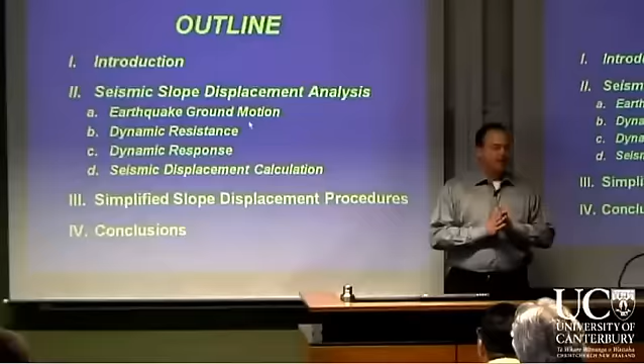The outline for the talk I'm going to give today is a brief introduction. You wouldn't be here unless you thought seismic slope stability was important, or were forced to be here because you were a student in my class.

We'll get right into talking about, with the aim of looking at simplified methods, the components of a seismic slope stability analysis. I want to go through these components because I think you should judge my method and other methods in this area by how well they capture the earthquake ground motion.

How well do they capture the dynamic resistance of the system? How well do they capture the dynamic response of the system? And then do they do the calculations correctly and provide good insight?

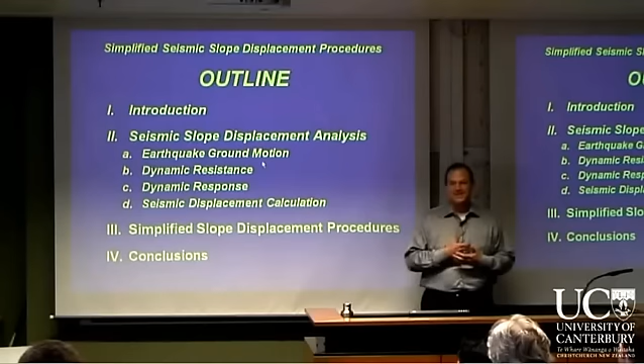Then I'll talk about the 2 bookends in terms of simplified methods. Really the landmark work is Newmark and Makdisi-Seed. Most senior engineers have performed Makdisi-Seed 1978 type analysis countless times and feel comfortable with it. Now this new guy is coming along to propose that you should be using the Bray and Travasarou 2007 method, and we'll see how that goes.

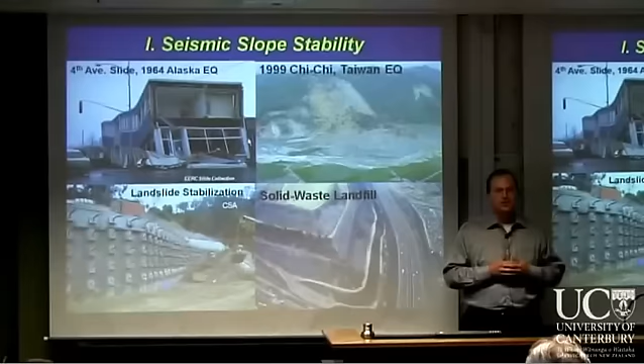Seismic slope stability is obviously very important. If you go to the 1964 Alaskan earthquake and look at the 4th Avenue slide and what it did to the infrastructure of the city of Anchorage, it's obvious that a clay slope, or a Bootlegger Cove clay, a sensitive clay, can undergo deformations that lead to disastrous impacts on the superstructure.

We have countless earthquakes that show landslides induced by earthquake shaking, and of course you had yours in the hills. In terms of projects, this is a landslide in Santa Barbara, Southern California, with Cotton Shires and Associates, where they had some static-induced landslides. In fixing that, they also have to look at the seismic considerations. And then we have potential cases like this.

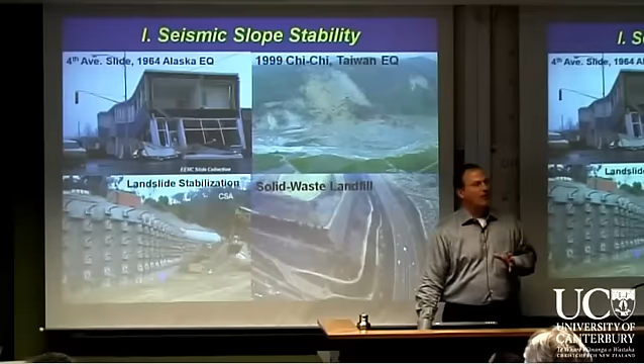This is actually a municipal solid waste landfill, a very nice way of saying we've got 60 meters of rubbish hanging over this very, very busy freeway. And if this is a slope of 1.3 horizontal to 1, if this fails and moves on top of this, that's not going to be a good situation.

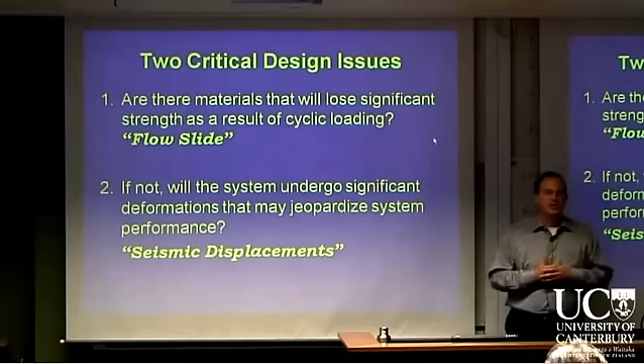So there's two critical design issues when we get into looking at seismic slope stability. I always want to step back. I'm known as the K guy, because we'll see as we get into this lecture, we talk about seismic coefficient, that's K. People will call me up and say, give me a sense of what the seismic coefficient is for this project. And I'll always sit back and go, wait a minute, what's in the foundation of this thing you're talking about?

What's the actual material comprised of, with the actual structure? Because nothing is more important in geotechnical earthquake engineering than the case where a material loses significant strength as a result of earthquake shaking. If you have liquefaction not only within the earth structure, but maybe in the foundation, that can lead to the dramatic flow slides that are disastrous. So always step back and look at that problem first.

The second most important issue is if you do not have materials that will lose significant strength, if you do not have a liquefaction problem below your structure or within your structure, then it's, will you get enough deformation that it might jeopardize performance? So now we have to have some methodology for calculating seismic displacements, because that's going to be our measure of performance.

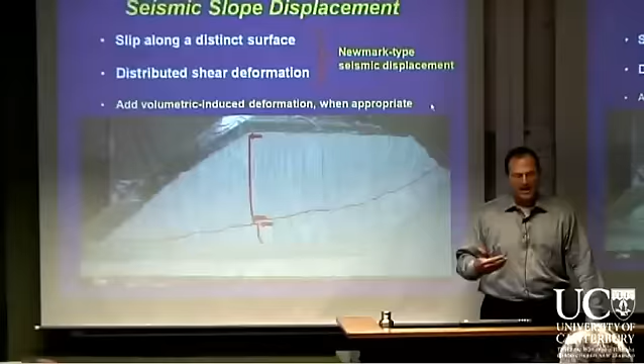Now, when I talk about this, I want to pull this in. This is a cutaway of a clay slope that was built in the laboratory on the shaking table at UC Berkeley. And we actually found that using spaghetti after dyeing it was excellent as inclinometers, because they had about the same strength and resistance as this model clay.

So we could put this slope on the table, we could shake it, and then we could actually excavate back. We have a number of displacement gauges and accelerometers, but we can actually cut away and look at the displacement field. And one thing you see is that there actually is a failure plane that develops.

You can see the offset in the spaghetti. So there is a clean offset where one block is sliding over the other block, and that's partially contributing to the total horizontal displacement at the top of the slope. But very importantly, you also see distributed shear. So there's two components when it comes to deviatoric shear, or distributed shear, or shear-induced deformations.

What I'm calling the Newmark type seismic displacement is the distributed shear within the sliding mass, because it's not rigid. And of course, it's the actual sliding on the slide plane. Very importantly, I am taking volumetric out. There's obviously no volumetric settlement in a saturated clay with undrained loading.

But I think you should, at minimum, even with a simplified method, want to break the world into volumetric, how much shakedown do I get, and then think about shear and deviatoric displacement separately. Because, yes, those things that cause more deviatoric response in a slope will tend to cause more volumetric response too. But for example, with a case with a saturated clay, that's not true. So a lot of other methods mix these two, and I think that's just fundamentally wrong.

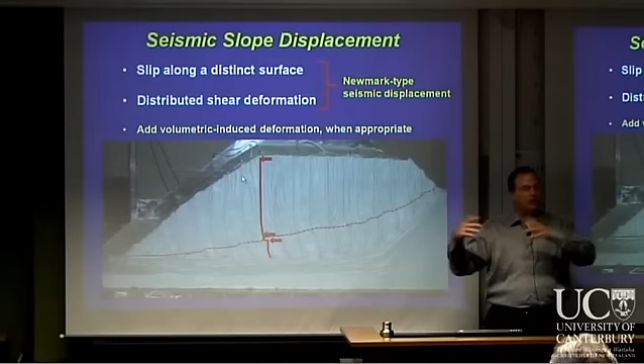So I'm going to say that my method is focusing on Newmark type displacements, which are focused on shear-induced deformations. If you have a system that's going to have volumetric shakedown, calculate that separately and then add that in to get the total displacement at the top of the slope.

We can do this in a very elegant way with advanced numerical analysis using a fully nonlinear model. So, for example, this is, before we cut it away, this is looking through the plexiglass. This is the original shape of the embankment. This is the post-deformation shape of the embankment. And you can see that it moved as a result of the earthquake shaking.

That's pretty good, so we can do really well on analysis. But let's be honest here, I can do well because I've actually measured the base motion. It's great to do an experiment and know exactly what the motion was at the base, but how many times do you have an accelerometer below your slope that has measured exactly the earthquake you're going to feel and have to design for? Recognize that these fancy, advanced analyses are only as good as the input that goes into them, and there's still value to a simplified method to get you in the ballpark.

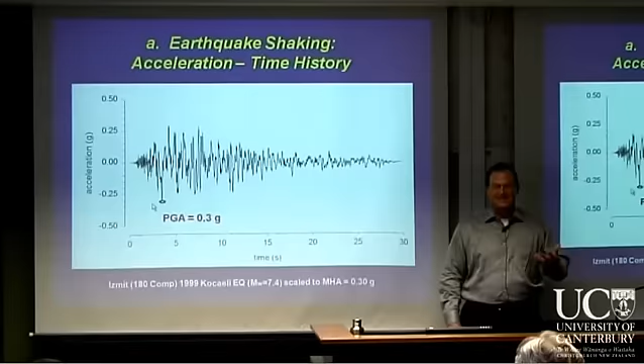The only thing that fully describes it is a time history—acceleration, velocity, or displacement. But we often like simplified parameters, such as peak ground acceleration. Obviously, we've known for some time that PGA can't tell us everything that's important. It's amazing how many times we get into arguments with regulators and reviewers about what the PGA should be, when in the end it's not the most important thing. There's other important things like frequency content and duration. Duration is critically important to any deformation-based analysis—the more significant cycles you have, the more cycles of slip you have.

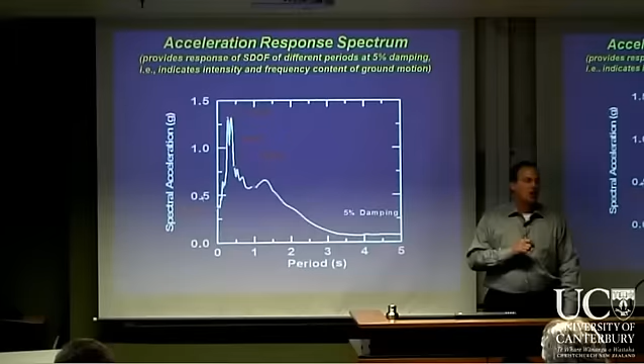The structural engineers got it right a long time ago when they came up with the concept of using an acceleration response spectrum at 5% damping, because it captures the intensity and frequency content of the ground motion. In a study we did for the Pacific Earthquake Engineering Research Center, where we tried to find a better way of characterizing ground motion, we found this works a little better in the short period range, this works a little better in the intermediate range, but across the entire period range, we could not find something better than spectral acceleration at the degraded period of whatever was shaking—whether it was a building, a bridge, or a slope.

So why not use spectral acceleration at the period of the system, since that brings in the intensity and frequency content? If someone is fighting you about PGA, you say: you pick whatever PGA you want, I'll pick the spectra and the ground motion, and I'll get it to be what I want in the period range of interest. That's what really matters. There's no regulators in this room, are there? Because I'm giving away one of my secrets.

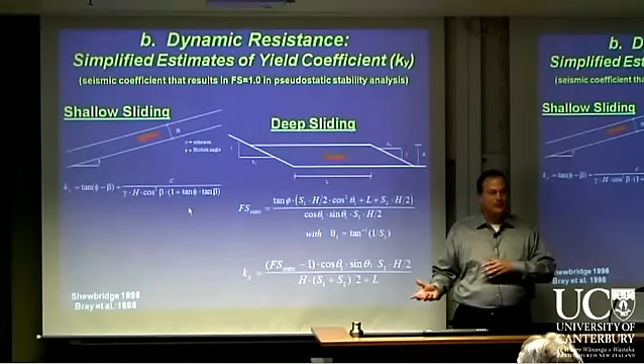Okay, then we get into dynamic resistance, and I want to spend a lot of time on this. If it's going to be a simplified method, I've got to give you some simplified equations. These are in the handout and in papers, so you can pull them up—one's an infinite slope analysis, the other's a deep sliding analysis. These are ones you can actually hand calculate, so if you're out in the middle of the field you can do those hand calculations. It's not that difficult to have your iPad or computer with you, and most of you have pretty easy slope stability analysis programs, so you can calculate the yield coefficient pretty easily.

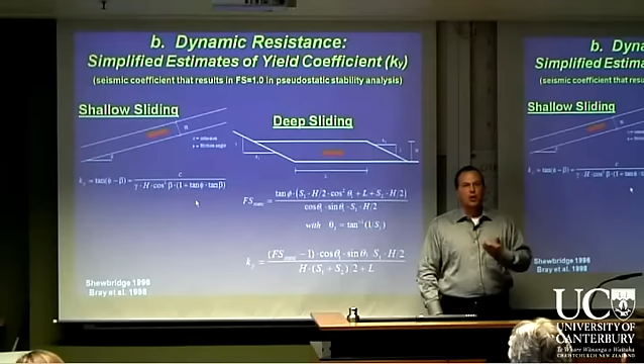The yield coefficient, remember, is that seismic coefficient you apply—a horizontal coefficient applied to the sliding mass, where when you apply that, the factor of safety drops down to 1.0. So you're doing a pseudostatic analysis, finding what seismic coefficient produces a factor of safety of 1.00.

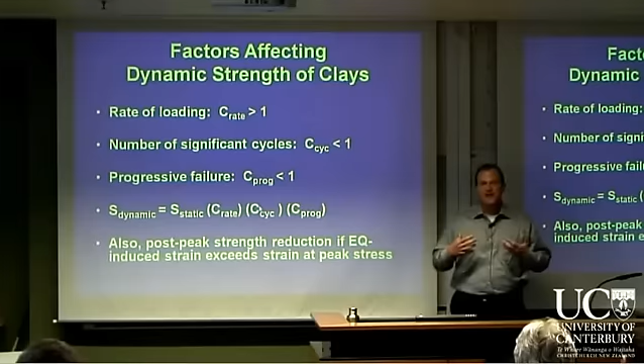As in typical geotechnical engineering, when it comes to static or seismic slope stability, it's the geotechnical properties, the engineering properties that really matter. So, for example, let's talk about clays—factors that affect strength of clays. We know we can spend a lot of time coming up with the static strength of a clay. In undrained loading, we might do a total stress analysis of that in an earthquake and ask, okay, what's the static strength? How do we modify that for dynamic considerations? We realize that clays are viscous, and so there's a rate effect.

That tends to be something in the range of 1.1 or 1.2 or 1.4. We know we get about a 10% strength increase for a log cycle increase in strain rate. But we also know from laboratory testing that as we work the clay and cycle it, we develop pore pressures, reduce the effective stress, and soften it, and its strength after that tends to be lower. So that's a factor that brings things down.

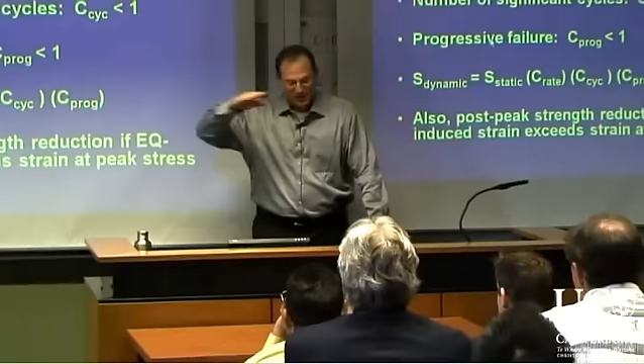Another thing is progressive failure. It goes in line with the entire failure plane not being mobilized at the same time, and I'll talk about that in the next slide. The important thing here is the static strength is where we spend most of our time discussing, investigating, and arguing. Then it's very important to select something that will bump it up because of rate effects, something that will bring it down because of cyclic loading, and something that will also bring it down because of the progressive nature of the failure if you have a strain softening material. And that's how we get the dynamic strength.

Clay does not have a single dynamic strength. It has a dynamic strength that's dependent on the earthquake shaking. So it's entirely consistent to use different strengths for the same clay depending on the ground motion.

If I hit this slope with a near fault forward directivity ground motion that has one pulse but it's really intense, I could probably take full advantage of the rate effect, and I don't have to take the softening due to the number of cycles because it's really a monotonic loading. It's just coming at it really fast. So for that case, I might use a dynamic strength that's 1.2 to 1.4 times the static strength.

On the other hand, if I have a backwards directivity, or I have the Alpine fault break, and I've got a low intensity ground motion with a lot of cycles, I'm not going to get as much of the rate effect. I am going to get a lot of degradation. Maybe that's a 20% drop or more depending on the soil. So for that earthquake, when I run it through my slope, I would probably use a dynamic strength that's less than the static strength.

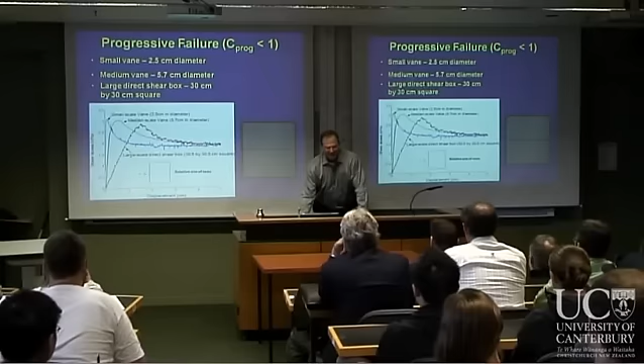I want to talk about this progressive failure because that's something that hasn't been talked about as much. The best way of looking at that is we took some model clay and put a really small vane in it, 2.5 centimeters, a bigger vane, and then we actually put it in a box and did a direct shear test. This is the actual measured shear stress versus displacement of the small vane, the medium vane, and the large test.

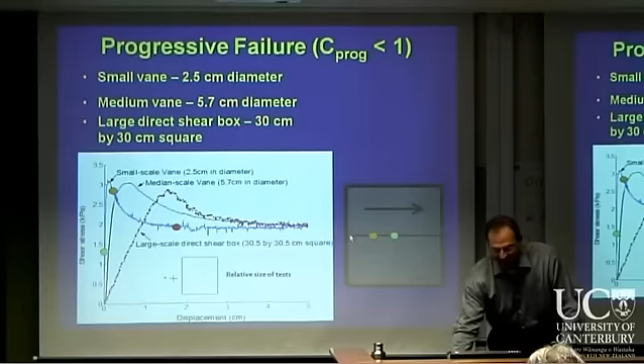If we think about the block moving, this clay right here actually immediately gets up to peak and starts getting down to residual. This clay here might have just passed the peak strength because of the deformation, since this is compressible material, we're moving the slide versus the bottom side, so this might have gotten down to just past peak. This clay is just finding out that it's starting to get mobilized. And so when you smear those together, you actually get this. We've actually done model testing where we break this into a bunch of little elements at the element level and use properties that are dependent on the stress deformation behavior, and we can actually match this.

The important thing here, it's a good and a bad. Good is it's more ductile. We're always worried about brittle failures. When you start smearing things, because you're not achieving failure along the failure plane all at the same time, it smears things a bit, and it's a little bit more ductile than what a vane shear in the field would suggest. On the other hand, the strength, because you're not mobilizing the peak at every element level at the same time, is actually less. So it's typically a 0.9 factor.

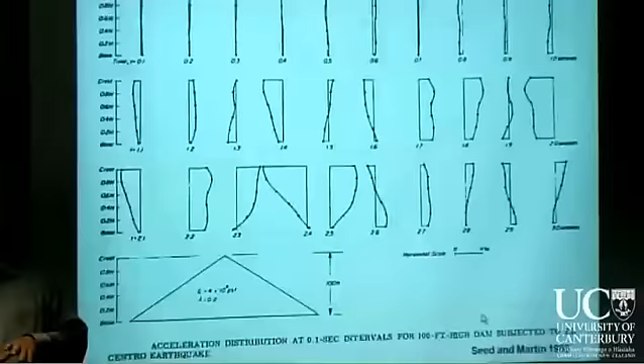Now into the third component, the dynamic response of the sliding mass. I like to go back to this because Seed and Martin in 1966 wrote a classic paper. In fact, before you read any of my papers, you should read Seed and Martin 1966. And I love this too because they borrowed this idea of an equivalent acceleration from a brilliant structural engineer named Anil Chopra, who was a graduate student looking at dams. Chopra made tremendous contributions in looking at concrete dams, and he recognized that concrete wasn't rigid, so he developed this equivalent acceleration concept. Seed and Martin were smart enough to borrow that idea and bring it into geotech, and that's the basis for the Makdisi-Seed method, and you're going to see that's also what we did later.

Back then analysis was very costly, so this was a very simple equivalent linear analysis with assumed shear modulus and damping, 30 meters high, very triangular, and they just ran the time history through, looking at what the acceleration profile right through the middle of the dam looks like at different times. Very important.

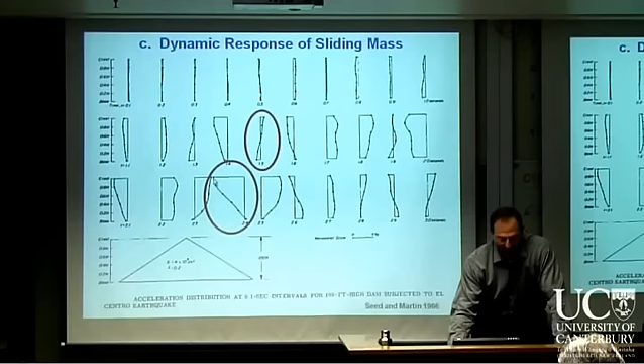Early on, maybe things are coherent, and everything's shaking back and forth together. But for example, at 1.5 seconds into the strong shaking, the top is accelerating to the right, the bottom is accelerating to the left, and the middle is not going anywhere. So I cannot use the acceleration at the base and apply that. I can only use an acceleration at the base if I believe what's above me is rigid. 100 feet of soil is not rigid, so I can't. Look at this case where I have my maximum acceleration to the left, at the crest is the maximum acceleration there, but the actual acceleration at the base is zero. So this is why they came up with this equivalent acceleration concept.

The idea is you take a sliding mass and you realize that it's not a rigid block, it's deformable. So we take each differential mass within the system and you take the acceleration acting at that level, you add all those up, you divide by the overall weight, if you want a dimensionless coefficient, to get this equivalent acceleration. That is the correct thing to use if you actually have a deformable body.

Now, because force is equal to mass times acceleration, you can make this even simpler by saying this equivalent acceleration time history is just the shear stress, the horizontal shear stress acting on the failure plane, if I have a 1D case, divided by the total vertical stress acting at that depth. Again, you've been working a lot on liquefaction because you've had a number of earthquakes that reminded you how important liquefaction is. This is not dissimilar to R sub D, okay, with the whole idea that you take this incoherence in and you have a reduction factor because of that.

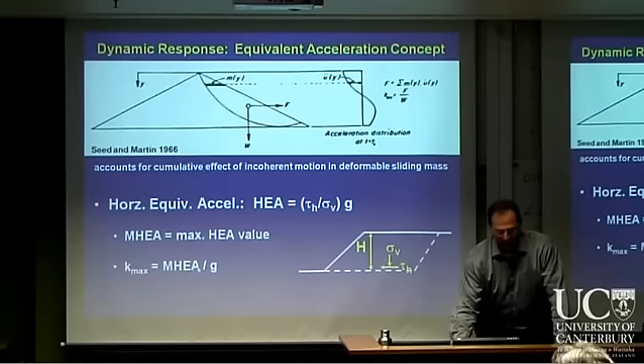I call this the equivalent acceleration, horizontal equivalent acceleration, to emphasize it's horizontal. The maximum value is the MHEA, and Kmax, which is the maximum seismic coefficient, the index of the maximum load, is this MHEA, which is in units of G, divided by G, so it's just this value without the G.

So let's look at what affects Kmax. The work done by Ellen Rathje and myself shows that Kmax, this dynamic loading, for a range of ground motions, I think we used a suite of about 80 ground motions. We used different profiles of foundations, different soils on top in terms of the sliding mass, and we found that Kmax varied as a function of PGA of the rock, which makes sense. If you double the rock motion, you probably double the intensity. But soil response is nonlinear, and so that's why we have a nonlinear response factor in there. It's not just strictly double the ground motion, double the seismic loading.

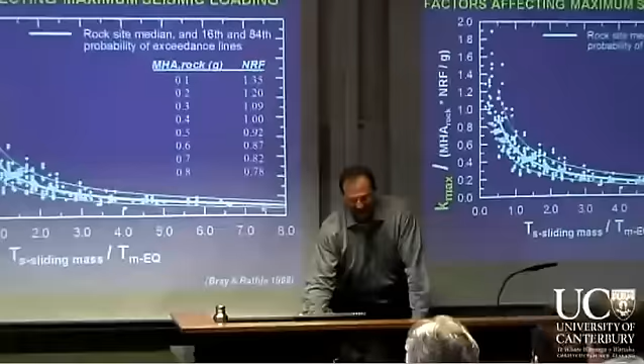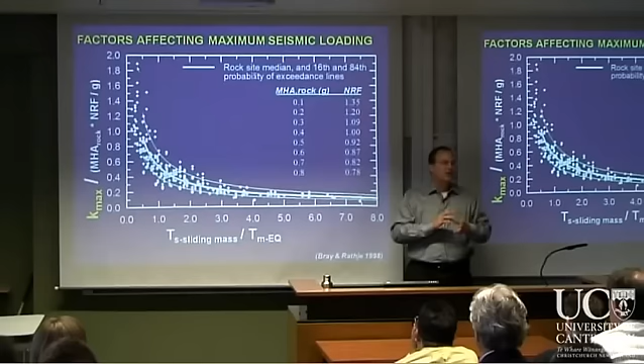But very importantly, it's a function of the period of the sliding mass and the period of the earthquake. As the system gets softer and softer and it walks away from where most of the energy is located, it's not shaken as hard. The seismic Kmax value is not as high as it is when you're basically near resonance. This kind of result tells you that near resonance, I can get really low responses and I can get really high relative responses. So a simplified method, and even a fancy, advanced analysis, is going to be much more difficult when you're near resonance, because every little detail is going to matter. But the simplified method might work really well because there's a nice controlled systematic reduction as you're walking away from where the energy is located.

This is kind of focused, or a resonance is at 0.5 instead of 1, because I'm using the initial period of the sliding mass. I'm not using the degraded period.

Kmax, this maximum seismic coefficient, is a function of the stiffness and the geometry of the sliding mass. A good index of that is the fundamental period.

If you actually have something that looks like this, you can just say, okay, 4H over Vs. If it's something like this, you can say, okay, that looks a little bit like it's 1D. I'll come up with an approximate equivalent H, and use that as my estimate for my dynamic period.

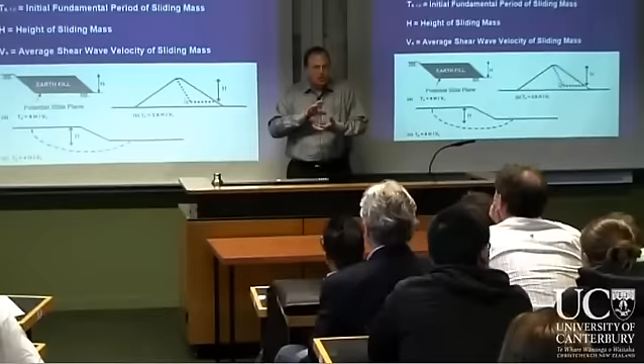If you look at a 2D section, some nice work done by Ambraseys and Sarma shows that that is 2.6 times the total height divided by Vs. So estimating the shear wave velocity of the potential sliding mass material, its stiffness, and having a sense of geometry is important, because what shaking matters is whether it's a very short structure or a longer structure.

Then there's the actual calculation, and there was a lot of work done on this in the 60s and the 70s, but we've converged to a methodology that does this double integration very nicely.

It's very important to remember that the initial Newmark analysis is a rigid block on top of a rigid plane shaking back and forth, and when you exceed the yield acceleration, you start to get slippage, and you keep on getting sliding until the velocities coincide. So there's a number of very restrictive assumptions.

Key parameters: the yield coefficient, that's the maximum dynamic resistance. The seismic coefficient Kmax is the maximum seismic loading. That ratio is important - if it's greater than 1, we essentially have no displacement. If it's less than 1, we get displacement.

Driving this point home, this is actually a large landfill, relatively 45 meters high, relatively softer material, so it really shows the importance of incoherence. I'm looking at rigid block assumption versus a deformable sliding block assumption, and looking at sliding along the cover, which is just about a meter down, at mid-height, along its base.

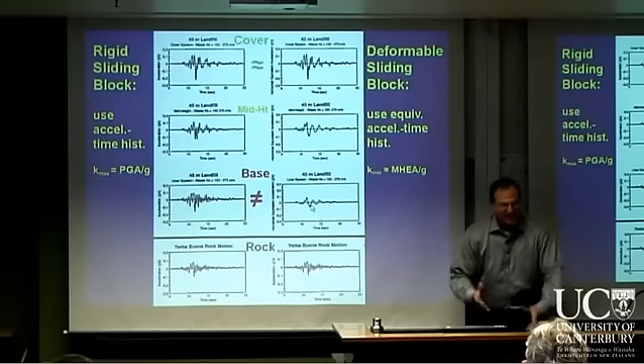Just letting you know that I put the same rock motion in these columns that we're analyzing. What we see is for base sliding, the equivalent acceleration, because it takes in effect the incoherence of the motion, is significantly different in terms of its characteristic than the acceleration time history.

If you calculate an acceleration time history at a point and you double integrate that with the Newmark method, you're assuming everything above is rigid, and that's not right. If you're down 45 meters into a waste fill, that's relatively soft. That assumption's not bad if you're only a meter into fairly stiff soil.

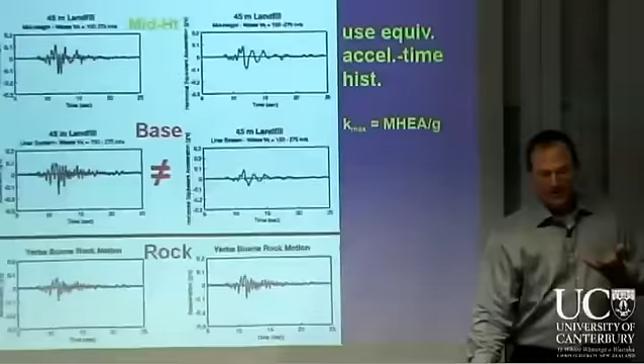So you can use the calculated acceleration time history directly to double integrate with the Newmark method to get the right answer if it actually is nearly rigid or incredibly stiff.

That's really what Seed and Martin saw, and then that was incorporated in Makdisi and Seed. And in fact, Bob Whitman, when he did a review of this, he kind of started calling it the decoupled approach, because what you do is say the system's not rigid.

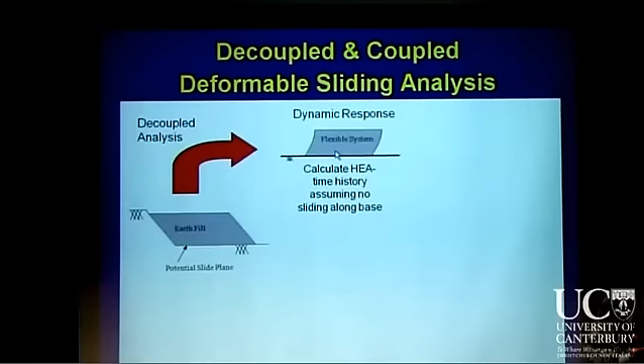People who just use an acceleration time history are assuming it's completely rigid, and that's wrong. They improved it by saying, well, no, it's an actual system that has flexibility. It doesn't have a period of 0. It has a period of a half a second or 1 second or 0.3 seconds. It has some dynamic response.

So they use something like Quad4 or Flush or Shake or DMOD or Plaxis to calculate the dynamic response of the sliding mass. Then they use that equivalent acceleration time history, double integrate it with a Newmark analysis to calculate displacement. Now you can see the reason why it's called decoupled.

It's obviously wrong. This method assumes continuity of displacement - there is no slip on the slip plane. I'm calculating a response and then calculating slip on the slip plane. So this is an improvement over the rigid block assumption, but it's not correct.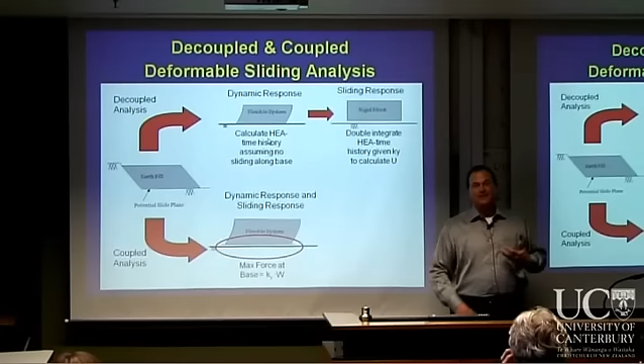Actually Anil Chopra in 1991 realized that and came up with a fully coupled analysis for a concrete dam. Ellen Rathje and I said, well, that's really nice - let's take that and make it into a soil, use the right functions for that, and do the same fully coupled analysis. So we developed a technique that does a fully coupled analysis.

So the system is shaking back and forth, and when you exceed the acceleration at the base, and it can no longer sustain that, it starts to slide. And while it's sliding, it's still shaking back and forth, and you capture all of that at the same time.

Now that we have this better, more correct method, it's been validated by some simple model tests where we shook not just a rigid block on a rigid plane, but soils of different stiffnesses. We find that the decoupled approximation, looking at the difference, when we're on the high side, the decoupled method is conservative. The method most people use, the decoupled approximation of Makdisi-Seed, is typically conservative. It's not overly conservative until you get to really large displacements, but by then you probably already know you have a problem anyway. So in the range of engineering interest, it's not a bad method.

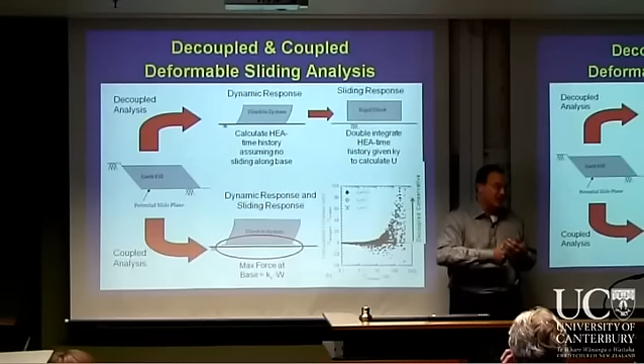There are some cases where it's unconservative, and those cases are forward directivity, near fault pulses. So when you're close in to an earthquake and you get a pulse, if that pulse just happens to line up, you can have greater displacement with the fully coupled method, and sometimes you can get less displacement. We just don't really understand those trends as well.

The most important thing to do, let's say you do a decoupled analysis, is to run scenarios. Say I have two characterizations: characterization A, which I think is my best estimate of soil properties, shear wave velocities and dynamic properties, and characterization B, where shear wave velocities could be a little higher or lower and slightly different. Run those different scenarios for each ground motion. In this case, I'm showing 5 ground motions run for each of those 2 scenarios.

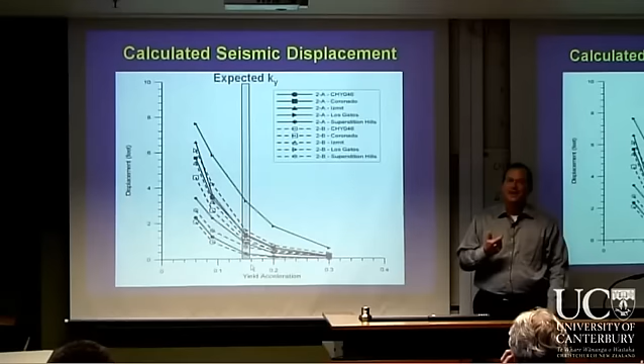You start to plot this up. Don't just calculate the displacement at the yield acceleration, but calculate it at lower and higher yield accelerations too, so you get a sense of how sensitive the results are to minor variations in yield acceleration. Because as geotechnical engineers we know we don't know the shear strength of clay to 2 significant digits, or definitely not 3, and we have uncertainty in these kinds of things.

So we want to use this as an index. I like to flip it around and look at it as a cliff. If I'm here, I could care less if it's scenario A or B. The ground motion doesn't matter as much, a lot of things don't matter. I don't need to spend more of the client's money figuring out details, because with large uncertainty in KY, I get the same answer: safe, low displacements.

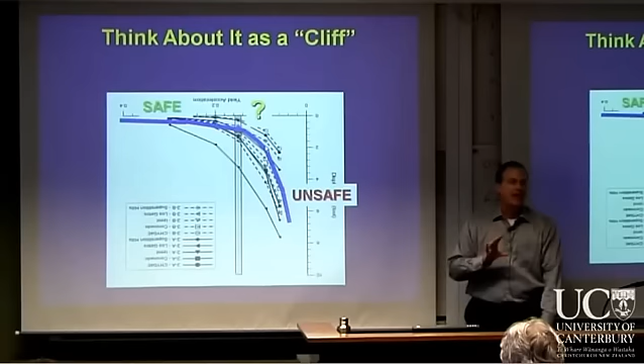I don't care over here either. Regardless of what's going on, I've got large displacements, and I don't need to invest the client's money to basically say I've got a problem. The simplified method, or these kinds of decoupled analyses, when you get answers in here where I'm not sure if it's here or there, and that's the make or break line, that's where investing in more advanced analysis and better site characterization will pay off.

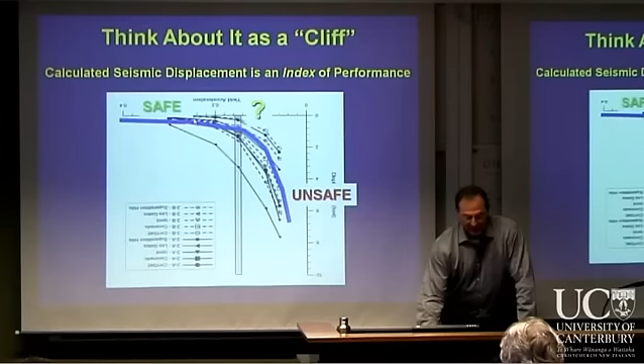So in reports I always call it the calculated seismic displacement, to remind myself and the client that this is a calculated number. I don't actually believe that this slope's going to move exactly 15 centimeters. It's going to move around 5 to 30 centimeters or so, something like that. So it's an index of performance, but it's still very useful, because there are cases of small displacement, large displacement, and moderate displacements.

For many projects, depending on the performance objectives, you can have small displacements. You never want to say zero, you want to say negligible, small, minor, give some range like 0 to 15 centimeters or 0 to 5 centimeters as the calculated range. You might have cases with large displacements, and maybe for this system more than 1 meter means you have to remediate, do ground modification, do something special. It doesn't matter if it's 2 meters or 4 meters, it's more than what's acceptable. And then moderate is somewhere in between.

It's critical to evaluate what this means to the system. I always like to step back and ask, what are the consequences of failure? Is it a tailings dam with people living downstream, or something that's 5 meters high with dry land on both sides? What kind of conservatism did I use in developing the seismic hazard? Did I use a 500-year return period, or a 1,000-year return period?

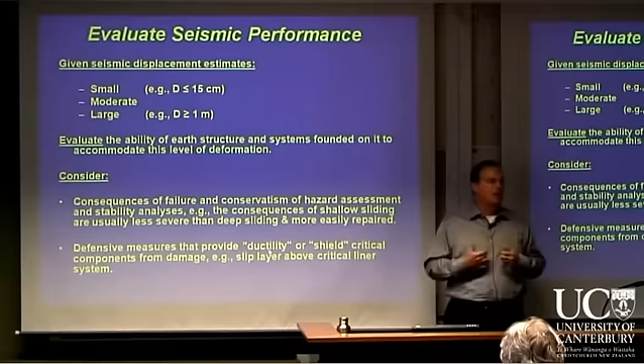And then the key thing is ductility. Are there ways, if I'm going to get a lot of sliding and have a critical system that can't withstand that level of sliding, to put a slip layer in a certain location that will let it slide there, as opposed to letting it slide wherever it wants, which might be through my critical system. So there are ways of engineering with that.

With that background, I want to take 2 critical analyses, and I'm going to try to be objective, but obviously I can't be fully objective because one of them's by me, of 2 well-used simplified methods: Makdisi-Seed 1978, and Bray and Travasarou 2007.

So let's look at this great landmark paper. There's 4 or 5, 6 steps, and we'll go through them. Number one is they very carefully talk about strength. Even though they're coming up with a new method for doing seismic calculations of seismic displacements of slopes, they spend quite a bit of time talking about those things I talked briefly about, reduction in strength due to cyclic loading and things like that.

What they say: if it's significant strength loss, don't use the method. If it's slight, they say use a small reduction. And the reason why: limit equilibrium has a rigid, perfectly plastic assumption, but real soil is nonlinear. So what they're realizing is if you cycle up to 90% of the peak strength over and over in time, you will accumulate distributed shear. They didn't call it distributed shear, but they're saying before you actually get localization and failure, you can accumulate deformations.

And so that's why they're saying use a small strength reduction. You calculate your yield coefficient based on geometry and the strength. This is my biggest headache with their method. All you have to do is do what I have found in my experience to be the hardest thing in the world: estimate the peak ground acceleration, including topographic and site effects, at the crest of a slope. That is one of the witchiest numbers in the world to estimate. It's all over the place.

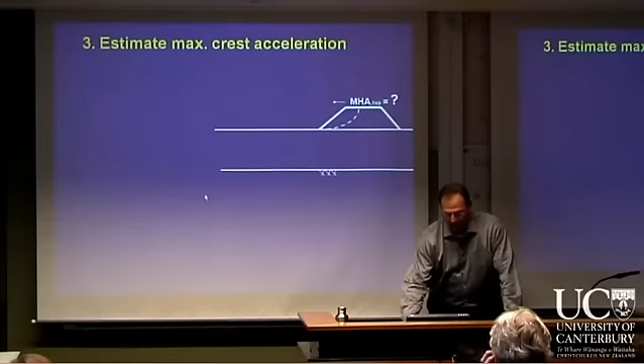Here's an assumption, here's an example. Here's some work done by Ellen Rathje and I, where given different rock motions of different intensities and different soil profiles, realizations, this is our estimate of the PGA, or the maximum horizontal acceleration, at the top. There's a bit of scatter there.

And so there are 2 types of engineers in the world. There's top-down engineers and there's bottom-up engineers. I started off life as a geotech when I transferred over from structures looking at fault rupture and how a fault comes up below a dam and impacts that dam. So I became a bottom-up engineer, and I've continued with that.

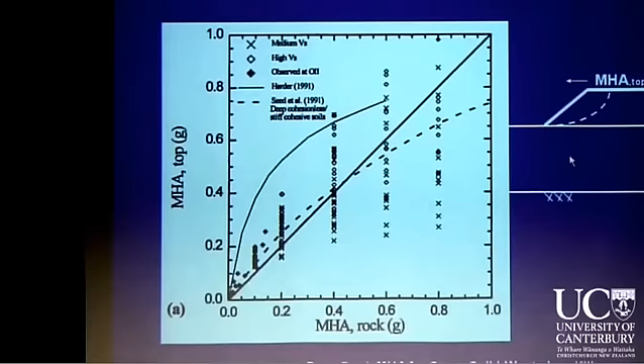And so that's why my methods kind of focus on the rock motion, characterizing that, and then seeing how it responds to the soil. This is kind of a top-down approach where you're getting the crest motion and then you're using that to go down and figure out the loading. This is a really hard thing to do.

If you have that, then this is a lot like R sub D, as you go deeper and deeper you get more incoherence, and so Kmax becomes a smaller percentage of the crest acceleration. But realize Kmax can't be more accurately estimated than the peak ground acceleration at the top.

The reason why I got into this is my first consulting job, I got involved and I did a fancy 3D dynamic analysis of a dam, and then I checked myself with Makdisi and Seed, and I got a value of Kmax over PGA out here. And so I knew I was wrong. And then I thought about it after checking it and realized they did one finite element analysis. Makdisi had cards back in those days, and he had to wait and pray that the computer would run those cards properly, and so he did one finite element analysis.

You cannot get a PhD at University of Canterbury, UC Berkeley, anywhere running one finite element analysis anymore, okay? But back in the 70s, that was a big deal, and then he ran something called a shear slice method, a very approximate method, and he ran it for about 6 ground motions. Okay? And so a lot of people think of these as bounds. Never call these upper bounds and lower bounds. They are not. If you actually look at the range of possibilities, it goes all the way out to here to all the way out to there.

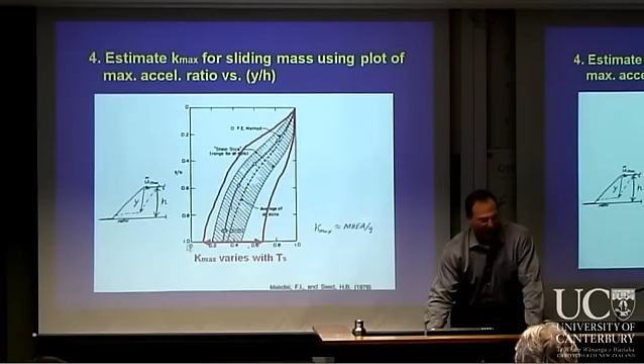Why does it vary in this way? It varies as a function of the period of the sliding mass. And when you look at the details of this uncertainty, there is some systematic variation within that chaos, and it's the period of the sliding mass.

Given that Ky and Kmax ratio, the thing that's missing is duration, so they use magnitude as a proxy for duration, and then you estimate displacement. This is on a log scale.

One thing when I teach this in short courses in the US, I always get somebody running out of the room. The famous Makdisi paper, they never corrected it, has an error in it, and if you use the actual chart that's in the original paper, you'll only be off by a factor of 10.

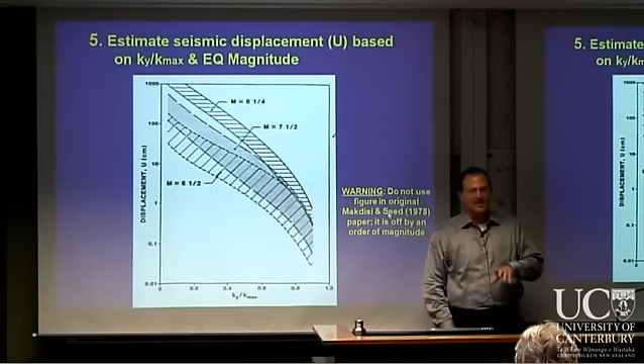Everyone knows that, right?

The late Professor Harry Seed was my mentor, a brilliant person, and I always listened to him. He said, and I quote, "It must be noted that the design curves are derived from a limited number of cases." He did a great job back in the late 70s.

For some reason, as great as this work is, it's kind of gotten entrenched as being correct, and it's almost wrong to challenge it. Nobody uses Seed and Idriss 1971 liquefaction triggering curves.

We've moved on to Youd et al., we've moved on to Idriss and Boulanger, we've moved on to the Seed et al. method. But for some reason, engineers have a hard time letting go of Makdisi and Seed, even though the late Professor Harry Seed said, hey, if you get more data and you can do better, you should revisit this problem. Why? He used a very limited number of ground motions.

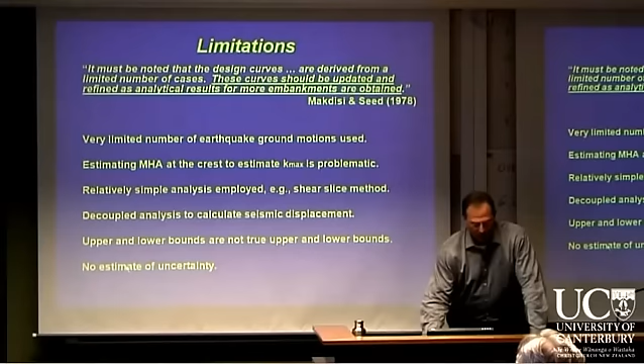He used the PGA at the crest, which has a lot of uncertainty. He used a very simple method, shear slice method, decoupled analysis. The upper and lower bounds are not there, and we're trying to get more into performance-based engineering. There's no estimate of uncertainty.

So let's look at it another way. Let's look at the Bray and Travasarou method. Not smarter, not better, I just have more data. He or she with more data should win.

So we're going to do a fully nonlinear, fully coupled, deformable stick slip analysis because we can with our computers. We're going to go ahead and say, let's use 8 different TS values, 10 different KY values, so we have 80 of those cases.

And this is the most important thing, the ground motion. So let's take all of the ground motions from the NGA database that was available for shallow crustal earthquakes, and let's use all the ones that are within 100 kilometers for 41 different earthquakes, run them through, and let's have Thaleia run 55,000 analyses so you don't have to.

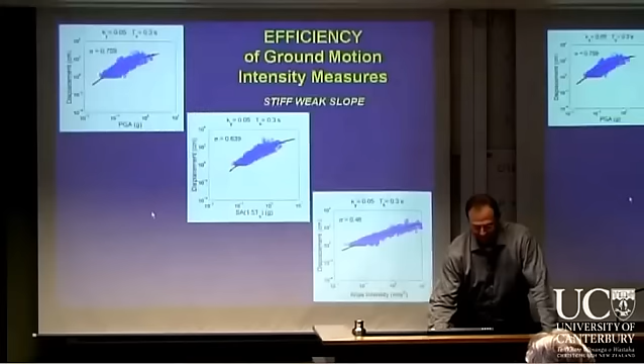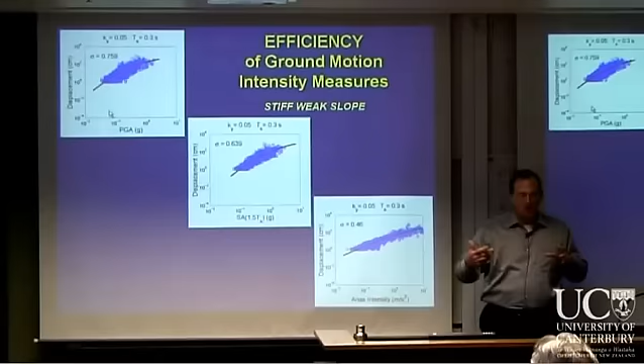First thing to do is, after you've done 55,000 analyses and you pat yourself on the back, you go, okay, what do we do with this? This is not data, these are analytical results, but we can start examining them like they were data and say, well, what's the most efficient ground motion parameter? For example, is it PGA?

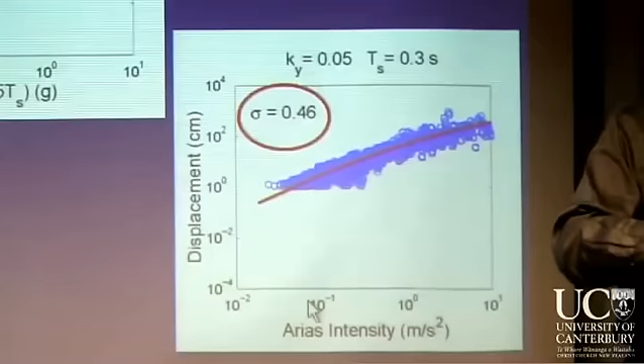You take the PGA of each record and correlate displacement versus PGA. How about spectral acceleration at 1.5 TS? Or how about Arias intensity? If the world was all stiff, weak slopes, it would be Arias intensity, and it captures the intensity, frequency content, duration. It's the one measure that's best if things are actually driven by acceleration.

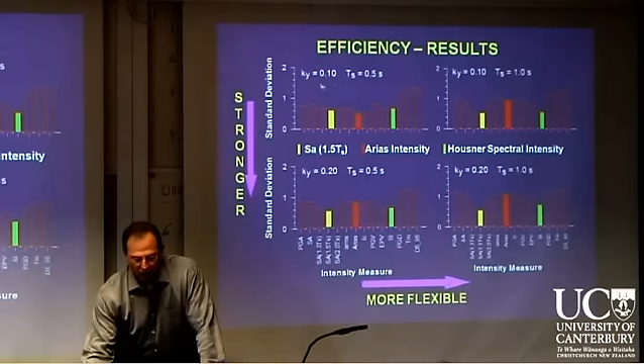But we're going to look at ranges. So this is actually KY of 0.1, this is KY of 0.2, both for a half a second sliding mass. This is same KY, but now we're going with a longer system, 1 second. So we're kind of looking at things that are weak and stiff, and then getting into things that are weak and more flexible. In this direction they're stronger and stiff, and eventually we get to being stronger in a relative sense and also more flexible.

We actually looked at 32 parameters, and I even came up with one called the Bray index, because this is my chance—Arias got famous, but I wanted the Bray method to work. I wanted the Bray parameter to work. It was a brilliant idea, but it didn't work. So you don't see the Bray one up here.

But what you see is PGA—I actually picked it because it's always good to pick some that will not work, it's a good sanity check, it better not work. Duration by itself doesn't work. Peak ground displacement by itself doesn't work. Some of the most promising are spectral acceleration at the degraded period.

That's why the 1.5 is there. This is the initial period, but with seismic shaking and induced strain, we actually get some deformation and some softening. So that's why the 1.5 factor is in there.

The red box is Arias intensity, and the green box is the Housner spectral intensity. What you find is, for example, if I have a weaker stiff slope, Arias intensity works the best. These are the standard deviations, so the smaller the better. But it doesn't do as well for a flexible system, because Housner's spectral intensity does better for a flexible system since it's out in the velocity range.

The one parameter that works the best over the entire period range is spectral acceleration at 1.5 TS. So we're going to use that as our characteristic of the earthquake.

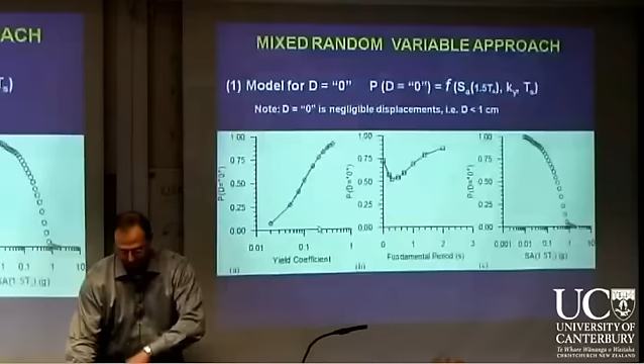Then we did the regression. You always do these regressions at least 3 times. The first time we did it, we found that data, whether it was 0.0001 millimeters or 0.1 millimeters, that's a big order of difference mathematically, and that was basically causing the form of our regression analysis. Then we got out of our mathematics room and said, we're engineers. Those are all the same number to me. Those are 0.

So we said, we can't let that data cause our regression to go the wrong way. We're going to say anything we calculate that's less than a centimeter, for all intents and purposes, is 0. So we want to predict when we get less than a centimeter. This is the probability of getting 0 displacement, where in engineering 0 is less than a centimeter. And you can see it makes sense: as the yield coefficient increases, you're more likely to get 0 displacement. As the ground motion intensity increases, you're much less likely to get 0 displacement. And there's an influence of the period of the sliding mass.

It's kind of almost the inverse of a spectra. So we say, okay, we'll have a function derived or regressed on the calculated data, as a function of these important parameters. Then we'll take all the other data that's greater than 1 centimeter and regress on that, and it'll essentially be based on the same things, but we'll have to add in duration, and a proxy for duration is magnitude.

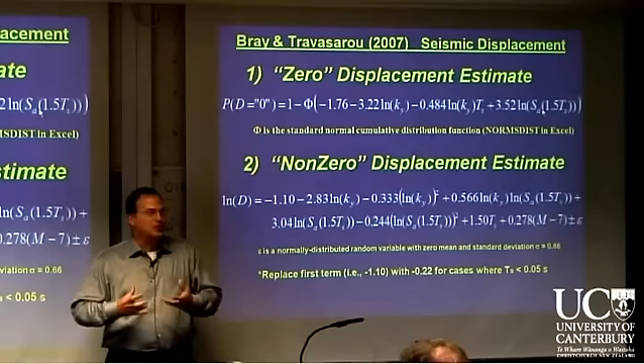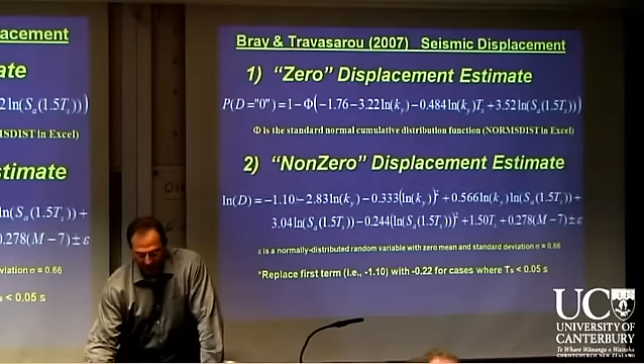Then, if I get a case where the probability of zero displacement is low, so I'm going to get significant displacement, then I go into this regression analysis, and I use essentially the same parameters and add in magnitude to estimate that. So let's look at the trends, what those results get you.

I'm looking at a magnitude 7 strike slip fault at a distance of 10 kilometers at a soil site. So my system that's going to slide is on this deep soil site. This is what the response spectra looks like at 5% damping. If I put that into equation 1 and plot the probability of 0 displacement going from 0 to 1 versus the period of the sliding mass versus different KY values, here's what I see.

If I have a low KY, it doesn't matter whether it's 0.04 or 0.08, I am going to get a non-zero displacement. It's a weak system. For this strong motion, this close in, of course I'm going to get that. So I don't spend money on measuring shear wave velocity. I don't care what the shear wave velocity of the soil is. It doesn't matter.

If I get into a case where I have a stronger system, then investing money into actually measuring, not just guessing or estimating, but actually measuring shear wave velocity might save your client a lot of money. Because I get a low probability if I have this as my period, but if I'm over here, I actually get a high probability of a zero displacement. So this is a nice way of getting a sense of what's important.

For the case where I calculate displacement for this ground motion at this site as a function of the period of the sliding mass versus the KY, again, you can see that for low KY values, the influence of TS is not that important. But for some KY values, that influence is really important, and so you should invest the money to measure the shear wave velocity.

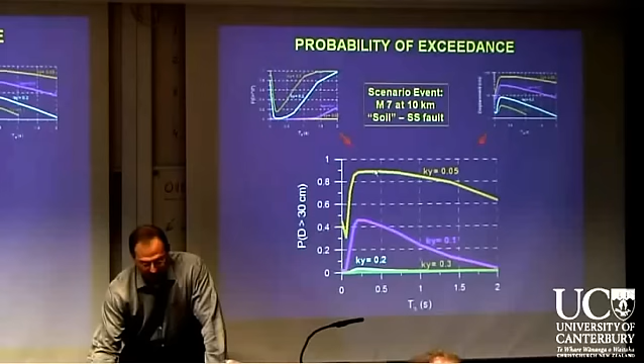I will most likely get less than 30 centimeters if I have a high KY value, regardless of what the TS is. If I have a really weak slope, I'm going to get more than 30 centimeters. But if it's an intermediate slope, I need to figure out what the period of the sliding mass is to be able to figure that out.

You probably want to know if it works, and the only true test is to actually run it against case histories. We ran through 16 case histories. These are just some of them, and I'll go through them real quickly.

First, I'm looking at a subset. These are landfills, solid waste landfills, that were shaken by the Loma Prieta earthquake in Northern California in '89. This is the documentation of how much displacement there was in reality, so this is the reality column. And this is what our method predicts for the probability of zero displacement. All of these cases, they shouldn't have much displacement, and if there is a displacement, it's low. So that's a consistent response. This is a good index of that performance.

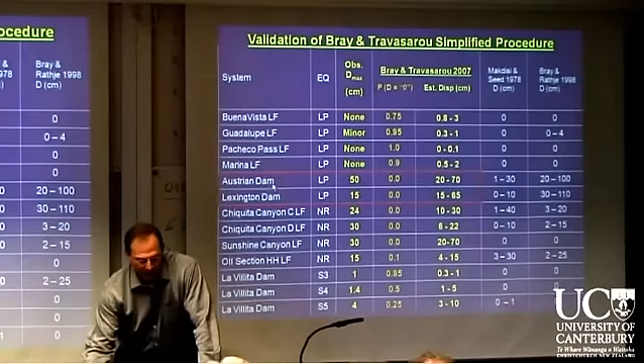Now we look at a couple of dams that were shaken by that same earthquake. You can see the actual observed displacements, 50 and 15 centimeters respectively for the Austrian and Lexington Dam. The method says you're going to get displacement - you're close to a big earthquake. And the level of displacement from the 16th percentile exceedance to the 84th percentile exceedance captures the range pretty well.

Let's go to landfills that were shaken by the Northridge earthquake. This is the observed movement. We're going to get displacement, and except for one case, which is the one that will never work out for any one of us, is this one we underestimated. But the rest of them, it's working pretty well. So I'm showing you that's actually our worst case right there.

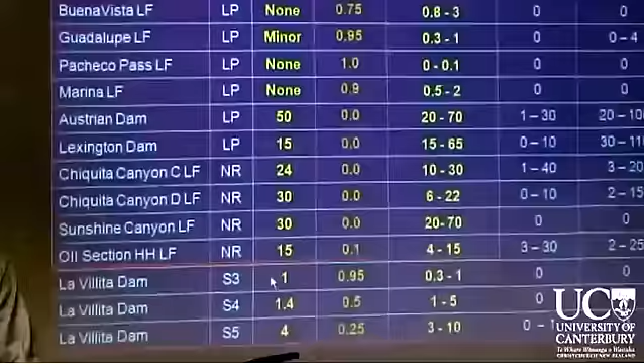And then this is too good to be true. I mean, I couldn't believe this. In fact, I still wouldn't believe it if I was in the audience. This is a dam in Mexico that was shaken by a number of events. They had really good instrumentation on it, so they had very precise measurements. Professor Elgamal at University of California at San Diego wrote a very nice paper on this. And there was a centimeter, maybe a little bit more than a centimeter, 4 centimeters.

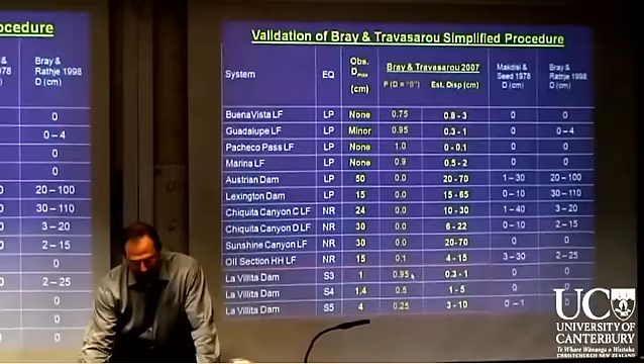I'm not as concerned about nailing the actual numbers. I think it's more important to get the trends right. And the trend is, as you go from S3 to S4 to S5, you get more displacement. Does the method have the same trends? Well, the probability of zero displacement goes down, and the amount of displacement goes up. It's actually maybe part luck and part greatness that it actually is in the ballpark.

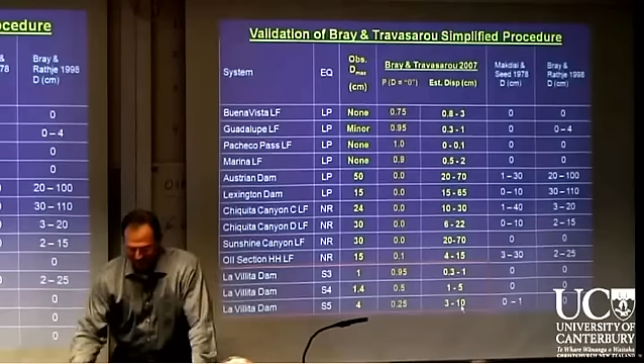Now, Makdisi and Seed is never wrong, and I didn't think that Bray and Rathje were not too far off either. So I'm not saying that what everyone's been doing is wrong. All I'm saying is now we have a refined tool. Because when you look at this, these are pretty consistent - low displacements, kind of intermediate or larger displacements, low displacements. They're consistent. It's just we're doing better now because I have 688 ground motions and they only had 6. And Bray and Rathje only had about 80. Plus, I think I've gotten a little bit smarter in 10 years.

Real quick example, and again, all these slides are available to you. This is actually Austrian Dam, but you don't know that, and I put it next to the Hayward Fault. It's not actually there, just as an example.

First, we look and say, okay, there's no liquefaction, there's no soils, even clayey soils, that will undergo significant strength loss. That's always the first check. We have some undrained strength properties based on some triaxial testing taken from this system. The KY was calculated with a slope stability program.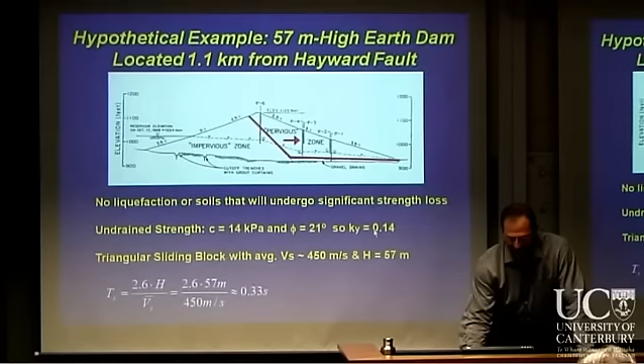Because this is more triangular, I'm using 2.6 H over VS, where that's the H. So I estimate 0.33. I look at my earthquake: it's a 6.9 at 1.1 kilometers. And so I calculate with reasonable ground motion models at that time what the spectral acceleration at half a second is, because that's 1.5 times 0.33, which is the fundamental period of the sliding mass. I get about 1 g.

I put that information into this equation. I calculate, you're going to get displacement. You probably didn't need to listen to my lecture to know that if you're 1.1 kilometers away from a 6.9, you're going to get displacement.

But then how much displacement? It estimates a median estimate of 40 centimeters, and the standard error term is 0.66. What that means to you as a practicing engineer is whatever you think is your best number, double it, half it, and that's your range. So the 16th to 84th percentile is about 20 to 80 centimeters.

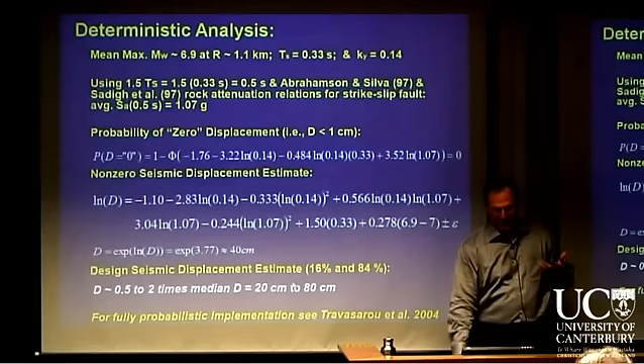I'm not going to be able to even tell you that I can do better than that. Okay, that's the range. That's enough - if that range is too much, you have to do something. Most dams can handle this range of deformation and not have issues.

But after presenting this, I found a number of people who said, well, this is getting too complicated. Can we make it a simpler thing? So I said, let's go back to the pseudostatic analysis. Pseudostatic analysis meets the criteria of being simple. It's a slope stability analysis that we're used to. All that we've added is a seismic coefficient to represent this incredibly complex level of shaking.

So the only way this could work is if I calibrate my seismic coefficient, dynamic strengths, and factors of safety against either case histories, that would be the best thing, or through more advanced analysis. If I can train my simplified pseudostatic analysis so that it gets an answer consistent with what I would have gotten from a more complex analysis, it might be a useful screening tool. One of the famous methods, the Rankine lecture by the late Professor Harry Seed, is from 1979.

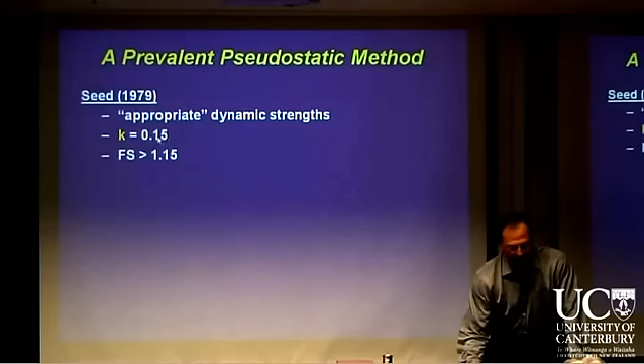He said use appropriate dynamic strengths, use a K of 0.15. If your factor of safety is greater than 1.15, with a few caveats, life's good. Very importantly, this method is based on a meter of movement being acceptable.

What happens if you have a system like a warehouse or a building or a house with lawyers in it where they think 1 meter of offset is too much?

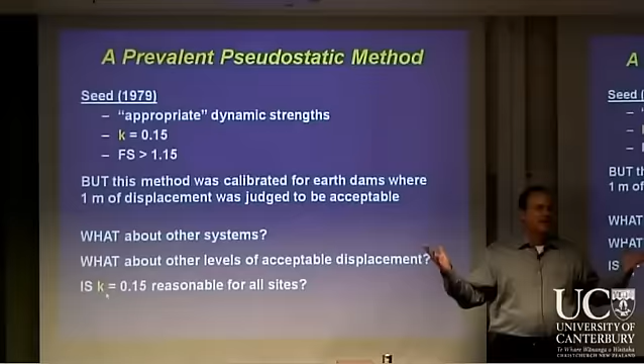And then when I sit back and look at this, clearly a K of 0.15 for the entire country of New Zealand, the entire country of the United States, the entire world doesn't make sense. I mean, obviously, if you're right next to the Alpine Fault, that's different than being 100 kilometers away and maybe having some smaller faults close by.

Also, the other thing is this factor of safety gives people this feeling of security. But realize when you calculate a factor of safety greater than 1.15, that's not necessarily safe, because that's calibrated to a dam moving a meter, and that might not be acceptable. So don't be seduced into the safety of a factor of safety.

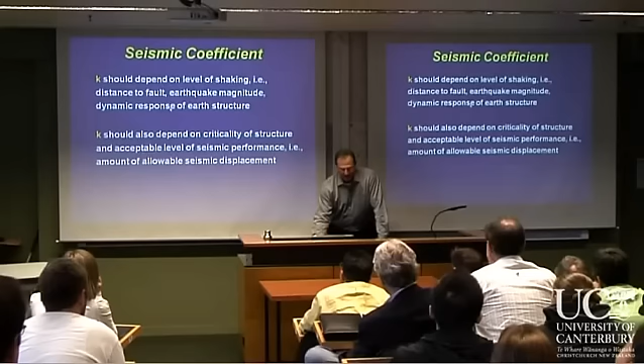Seismic coefficient. This seismic coefficient, this K, should depend on the level of shaking. We know that from looking at case histories and analysis. Things like distance to the fault, the earthquake magnitude, the dynamic response of the earth structure. It should depend on the criticality of the structure. It should depend on what is the acceptable level of displacement.

So how do we choose this K? Well, we came up with this relationship. Why don't we calculate the K as a function of everything else? Instead of calculating the displacement as a function of a bunch of things including K, let's calculate the K as a function of the displacement and the seismic loading and everything else.

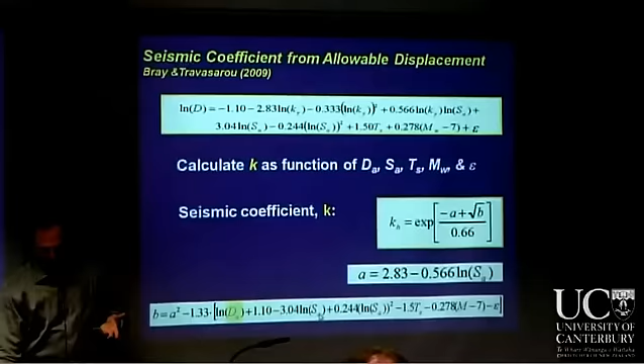So we just do a little bit of mathematics and we turn things around, and so you say, okay, pick your displacement, characterize your seismic loading, your dynamic period of the sliding mass, your magnitude, put it in here, and calculate the K that's compatible with this.

This is exactly what Bob Whitman did for retaining walls in training his system. He basically came up with a method for estimating displacement given a bunch of things, and then he realized retaining walls are pretty simple structures. Why don't I turn it around and figure out the seismic coefficient that's consistent with that level of displacement and that level of shaking.

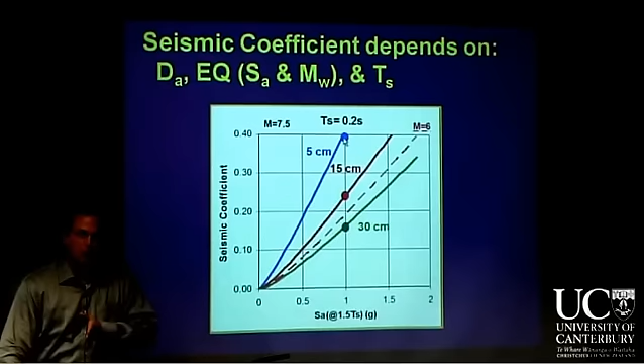So this is the method: always check to see whether you have strength loss, use strain compatible dynamic strengths, select what you say is your acceptable level of displacement given the system and the uncertainty or confidence interval you want, estimate your period of your sliding mass, and characterize your seismic demand. If you use a K that's calculated with that equation in a pseudostatic analysis, and you calculate a factor of safety greater than 1.0, then you are confident at the chosen level that you're not going to get more displacement than dA.

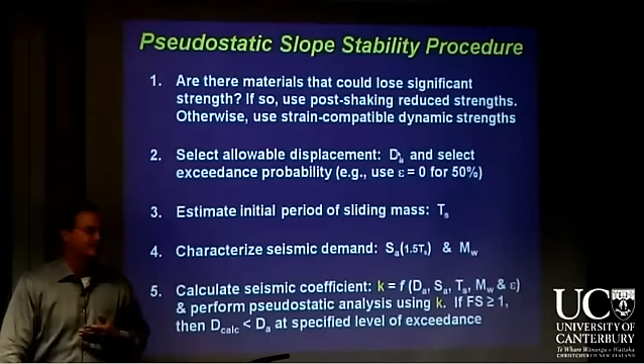So you can choose the acceptable level of displacement, characterize the earthquake, and then figure out the K that when you put it in a pseudostatic analysis, if you calculate a factor of safety greater than 1.0, you're fine.

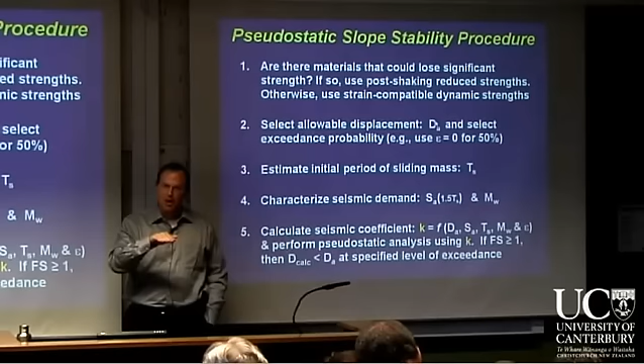And everyone knows that factor of safety is actually not a really good parameter for dynamic analysis. If something has a factor of safety of 2, you'd like it to be the same percentage safer than a factor of safety of 1.5 as 1.5 is to 1, but it's highly nonlinear. That's another reason why I don't like to use a factor of safety of 1.15 as my dividing line. Let's use 1.0, but tie that to the acceptable level of displacement.

Liam Finn liked this, and he was part of a group that I went to Canada a few times with, and they said we need to use this in a code. So let's even simplify the simplified method. Let's take a simple stiff slope and a simple intermediate slope, and assume that for most systems we're designing these things for, they can accept 15 centimeters of displacement.

And so that boils down into something that's actually now used in Canada for a screening analysis: they pick a seismic coefficient tied to 15 centimeters of displacement. It's just a function of the intensity of the ground motion, which you can get from ground motion maps, and magnitude, typically around 7.5, maybe sometimes 9, sometimes 7. I know this is right because for the typical case, 7.5, if you take 0.25 times SA, that's what comes out of this. We know that SA is about 2.5 times the PGA for most spectra. 2.5 times 0.25 is 0.65.

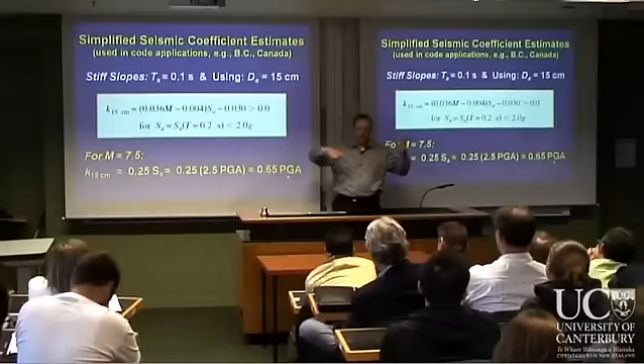Anyone who's worked in earthquake engineering knows that whenever you present something with 0.65 in front of it, it has to be right, right? So here it is, seismic coefficient. In fact, it's funny how we go around the world. The old timers in the 60s and 70s often said, you know what, if I pick a seismic coefficient that's about 60 to 70% of the PGA, won't I get something that's about right? Yeah, about.

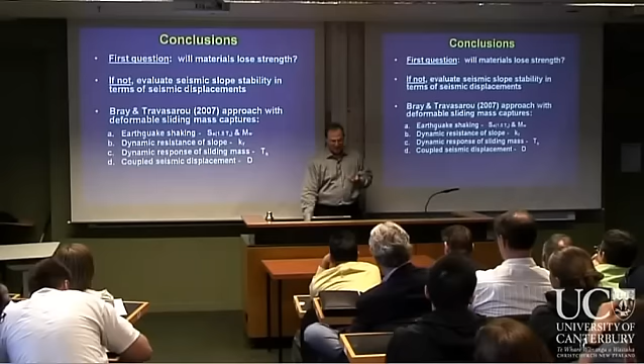So, in concluding, the first question is always: do you have materials that will lose strength? If not, then you look at the seismic displacement analysis. I propose to you that the Bray and Travasarou method is superior because it captures the deformable sliding mass. It has, I think, a nice way of capturing earthquake shaking, the spectral acceleration at the degraded period of the sliding mass, and magnitude for duration.

It uses what everyone uses for KY. It brings in the deformable nature of the sliding mass. It does coupled seismic displacement as opposed to decoupled seismic displacement. And in the end, this simplified method is useful because it focuses your attention on what really matters, and that is the earthquake characterization and the soil characterization. That's where you focus your attention, and then let this calculation get you in the ballpark. Thank you.